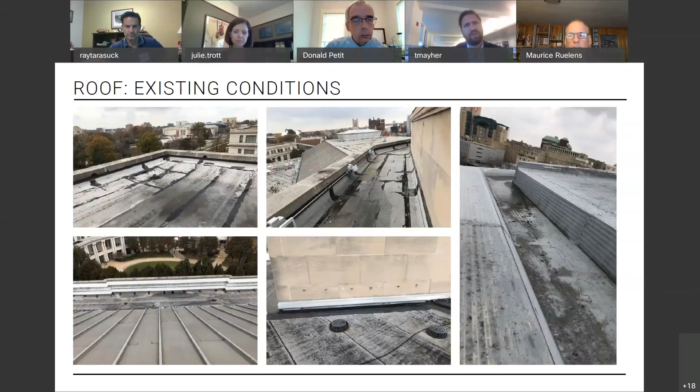You can see where those roof areas are identified on this aerial plan. We are looking at replacing the modified built-up roof in the section identified as section 1, and what we call the wedding cake roof, which is the main drum at the top.

That's a flat seam metal roof that will not be replaced, but a clear sealant will be applied over top of it. About 10 years ago, the same sealant was applied to that metal roof and it's held up for 10 years. There are some leaks on the south side, so we're going to recoat that entire metal roof with this new clear coating, which will again prolong the life of the roof.

The number 3 roof area is the metal standing seam roof, really the only roof plane visible from the street. That's in good condition, so we're going to keep it as is, and it should last another 10 to 20 years without significant maintenance or replacement. But the other roof areas, in sections 1 and 2, are not visible from the street, and we are going to replace them.

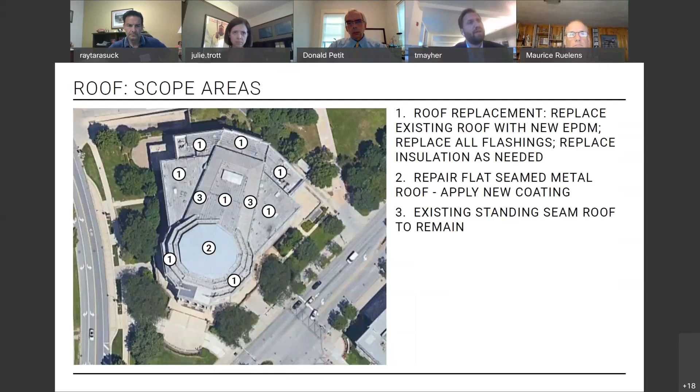What we are going to do differently with the roof is add solar panels. Severance Hall would like to provide solar panels for more sustainable energy to the facility. We worked with BT Solar and identified certain areas of the building where we could put solar panels that would have very minimal or no visual impact at all.

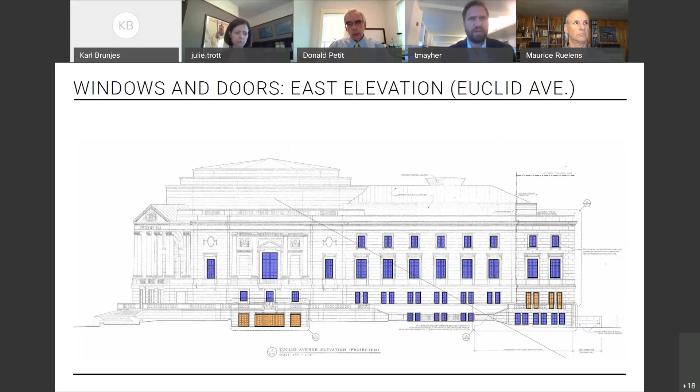Again, this is the elevation off of Euclid Avenue. So you're seeing most of these are the original windows, and the section of the building to the far right of this image are the windows from the 1990s addition.

Also, I mentioned the budget concerns from the first part of the project, our first part of the presentation. These were a far greater cost to replace than the rest of them. So we are not doing any work at these windows at this time.

Next slide. So the product that we identified for the windows is going to be a Graham Architectural product windows system. They have a historical architectural window—they have several products that are for historical architectural windows that are aluminum that have worked in many buildings across the United States.

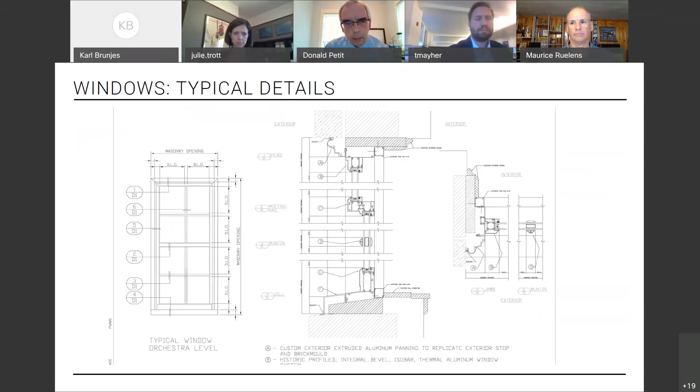I think the last thing we'll talk about is site work. I think, again, if we had full budget, we'd do a lot more site work, but we focused on getting the building dry as much as possible.

So we'll replace those grates with more ADA accessible approved grates for drainage. Then we'll replace the pavers with concrete.

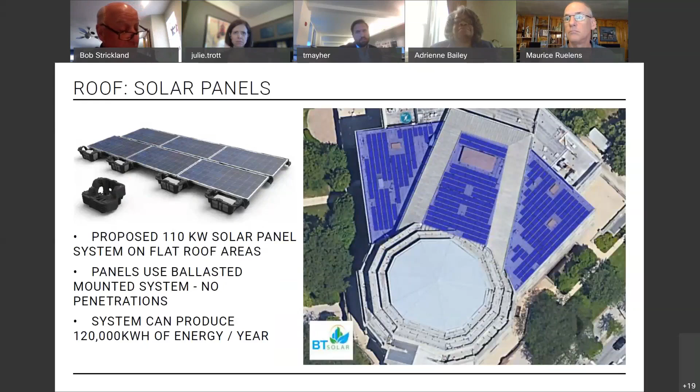And my second question was on the Garfield Memorial project. We had an opportunity to review several of the replacement mortar samples, and I wondered if we would have a similar opportunity for this project to weigh in on the actual replacement mortar samples.

Let me address the paver replacement real quickly. Those pavers, I think, are maybe a 6-inch paver square, so I do not anticipate a score line on the concrete that tight, but we would have some sort of score line control joints in the concrete that would reflect a border similar to the pavers, but also reflect the architecture, pulling some score lines off of the mullions of the doors. As far as Garfield goes, with the mortar replacement, yes, you're welcome to review the mortar at this project.

Just a caveat: the mortar at Garfield, we replaced all of the mortar in that building. We were studying which mortar we should replace, because there were a variety of different mortar colors on the building, since it had been replaced in sections over time. So we reviewed, tried to identify an example of the original mortar, and looked at samples that best matched what we thought was original to the building.

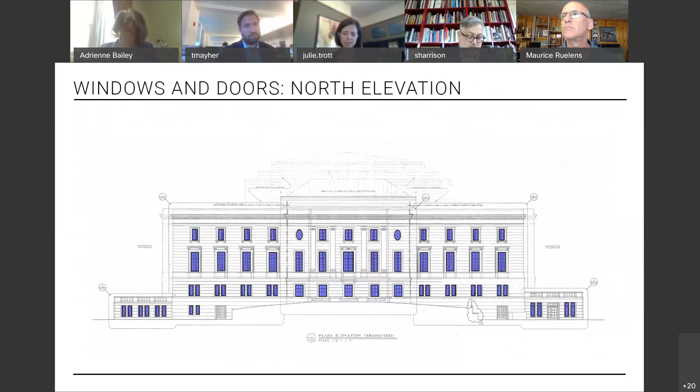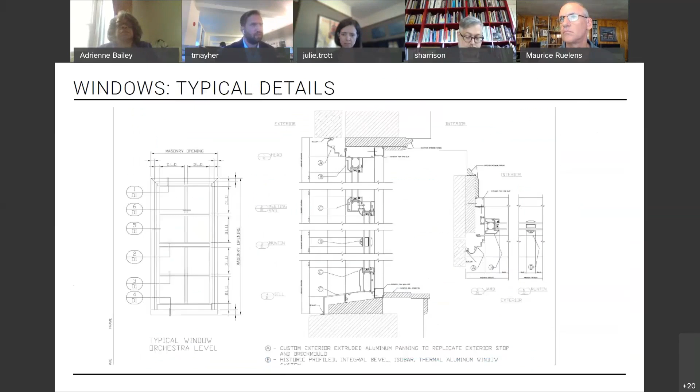And the doors, will the repainting of the aluminum doors also match the windows, or will they stay more of a natural aluminum color? It will match the windows. Okay, and will the brick molds be maintained or replicated in the window replacements? They will use a brick mold from the manufacturers. They have dozens of brick molds available, and we'll find one that's closer matching to the one at the existing windows right now.

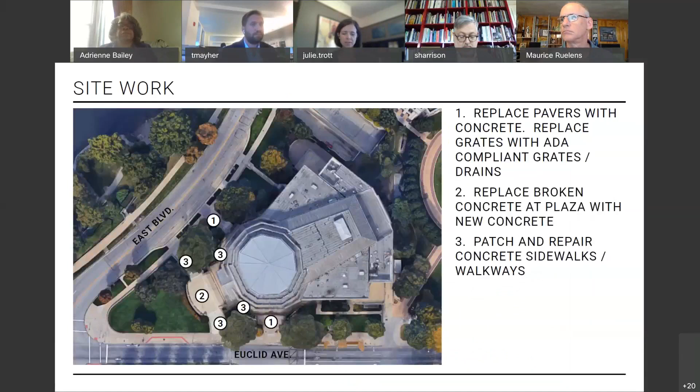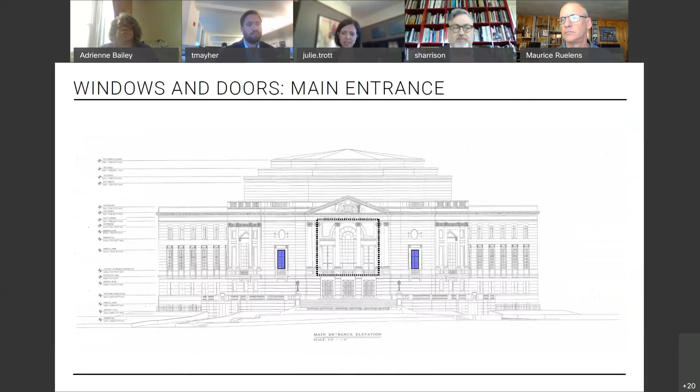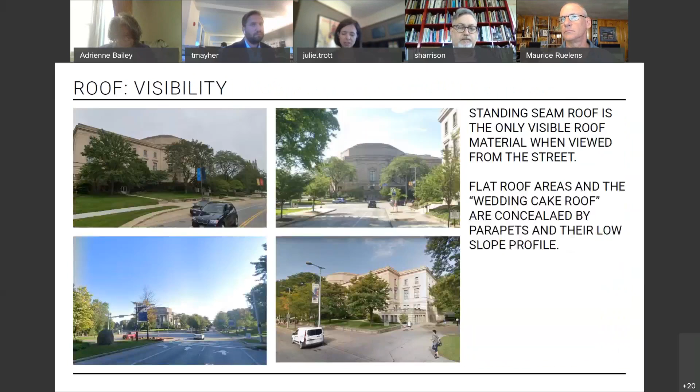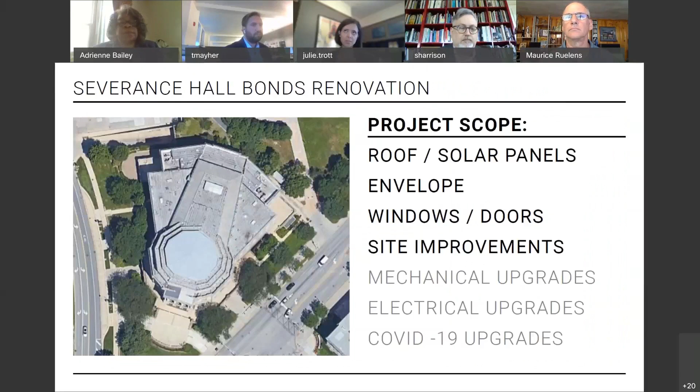Okay, well, personally, knowing the Musical Arts and the care that they take on this facility, I think it's a very respectful restoration. I agree with Mr. Harrison—no one likes to replace windows, but these windows have lasted 90 years, and the orchestra has thrived and done the best they could with the windows they have. So I think it's a very respectful restoration of the windows and roof. I really appreciate Musical Arts pushing the envelope on the environment and trying to incorporate solar panels and improve the building performance, knowing that they are a nonprofit and funds are always limited toward building maintenance. So I think it's a very nice proposal. Go ahead, Mr. Petit.

That's all right. You stole my question, so I'm good.

Are there any other questions from the commission, or would someone like to put forward a motion? We have Ms. Bailey. I propose the motion. That's why I was asking the question, what was part of what I'll be making the motion on.

I move that the motion is to approve as presented, with samples of the windows presented to staff for approval. And that's all that I have, unless it's something I missed.

Madam Chair, Mr. Harrison. I just want a second. Okay, so we have a motion, we have a second. Further discussion, go ahead. That was why your hand was raised, Mr. Harrison? Yes, yes. Okay.

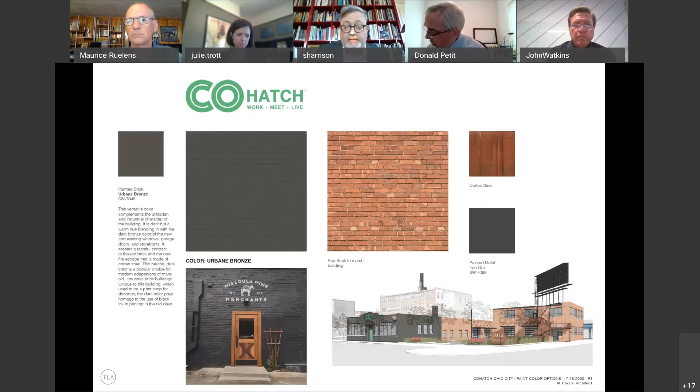However, I'm not sure that it really goes well with the other color scheme of the buildings. So, I still think the urbane bronze is too dark and not appropriate to an early 20th century building, and the gray I find anemic. But that's my personal opinion. I think the most historic color of these three is the third one. So that's just what I would like to add. And I don't know how I will vote at this point.

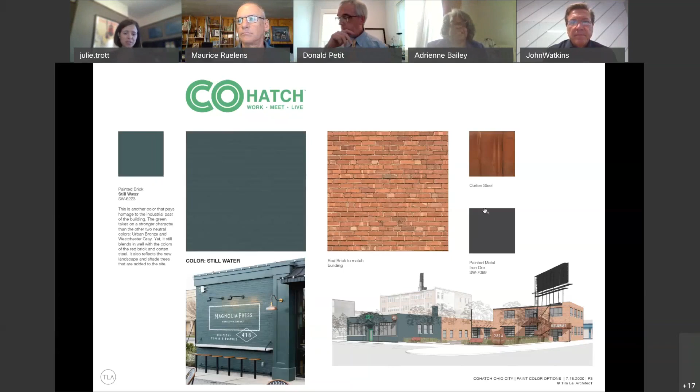Mr. Secretary, could you call roll and announce the results? Ms. Anderson, yes. Ms. Bailey, yes. Director Collier, absolutely, yes. Mr. Dreyer, yes. Mr. Harrison, yes. Mr. Strickland, yes. Mr. Tarasuck, yes. Ms. Trott, yes. Motion passes unanimously.

Thank you very much, I appreciate everyone's time and consideration to this project. Thank you, we look forward to seeing you Commission members soon. I'm very pleased to be a part of the community in Ohio City, and we're hoping to begin construction in October and open in late spring, early summer of next year. Excellent, well thank you, and we look forward to seeing your project move forward. Thank you very much.

That concludes our certificates of appropriateness for today. We'll move on to concept plans. We have one on the agenda today. It's located at West 28th Street and Church Avenue. It's new construction of Live Work Longhouse. The applicant, please use your raise hand function and tell us about your project.

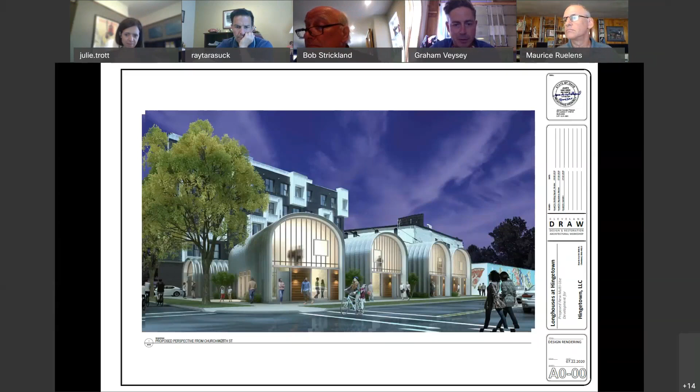If you want to progress to the next slide so we can see a site plan, this will be a little bit more helpful, but I wanted to give visual context of this. Maybe one more. Marika is also my partner, not only in these projects, but also in life. I'm only seeing the render still, so it's still looking okay.

If you progress one more slide, we can actually see the layout of the 7, how they fit. The entirety of Church and State, so that property line behind parcel A, down, that's the ramp down to the underground parking. There'll be a vehicular alley there. Again, this is some of that neighborhood context. Keep moving. I'm looking for, it would be slide 6 in the deck. There we go.

So it's a slide after the context photo. Yep, it's on there, just in a second. Perfect. Technology is wonderful.

For the vehicular lane, we're using permeable pavers that have grass coming through them, so you get more texture there. Don't think of a blacktop cutting through the property—that whole wall to the west is where there's the ramp down of Church and State. We're trying to create a little bit of space between, a natural alley, and then you've got the 7 structures in different lengths, with heights slightly different.

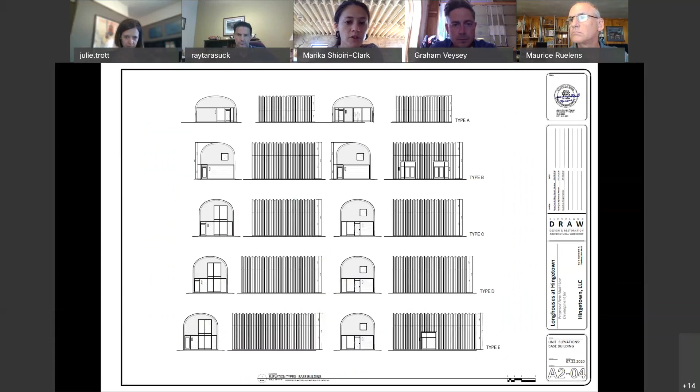Basically, we've tried to keep these interior spaces as open as possible. We're interested in them being very flexible live-workspaces, so we want to keep them as flexible as possible for whatever uses people might want.

You can see here we have very simple, pared-down kitchens and bathrooms, but they are full ADA kitchens and bathrooms. We have essentially a long bar of kitchen and bathroom tucked to one side, hiding a linear staircase that heads up to the mezzanine level. The dotted lines show the line of the mezzanine.

So there would be an upper level that, if it was a residence, somebody might use as their bedroom, or somebody might use as an office. And then there's a really nice double-height space on the left side of these plans, so people will have that double-height living space.

As Graham mentioned, we've tried to orient some of the windows so you get sight lines all the way through the buildings. Each unit has access on both sides. We were really just trying to make these very open, flexible spaces that can be used in a number of ways, clustered around a central court to create a small creative community. That's kind of the goal.

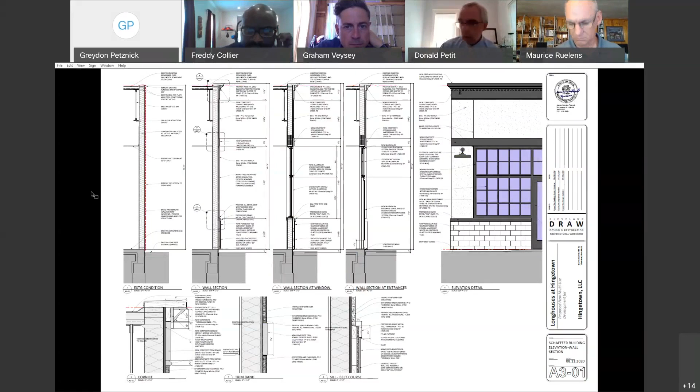One other thing I want to bring up with respect to the burden we have in making these decisions is you have to look at the long term. You look 20 years out, what will this look like from a design perspective. I like that you talked earlier, Graham, about using this as potential live-work commercial space, so that adaptability is very important. 20 years from now, we often design to today, and we don't think about how the site will evolve or how units could be rethought if conditions change. I think we need to be mindful of that.

Just being mindful of how we do design and architecture so that it's somewhat timeless. The beauty about the Landmarks Commission and historic preservation is that there was a time where things were built where the design was timeless. It lasts 100 years. This is what makes an adaptive reuse project relevant, because the base architecture was such that it's like that sport coat you can wear for 20 years and it never goes out of style, and you can rock it with some jeans. So thinking about how you make sure these designs and land uses are flexible and can adapt to change, so you don't get a cool thing today that becomes an eyesore in 20 years. We have to make sure we're thinking about those things, and that can be very difficult, particularly in a time where we want innovation, which I think this project brings to bear.

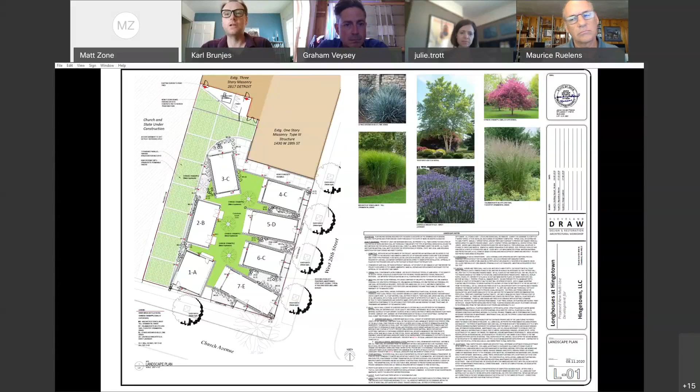When asked why they were pushing for final approval, the applicant stated it was a COVID-related, quote, 'slow as molasses' process, and there's some questions I'd like to ask regarding that first. Slow as molasses on a cold day uphill. Okay, I will ask, when did you first come up with this concept for this area?

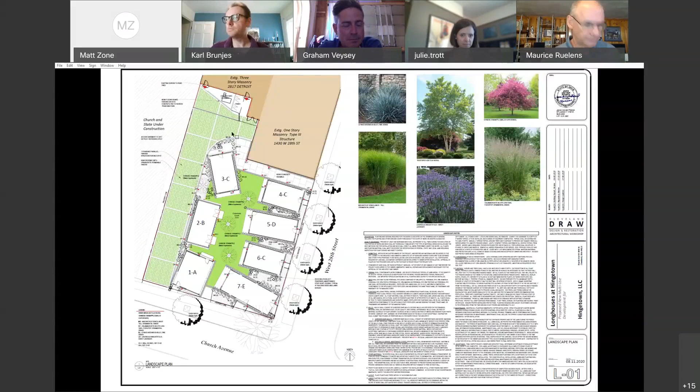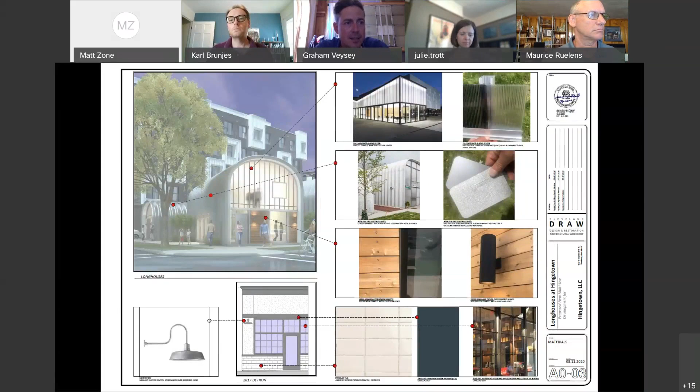We engaged Greydon last year. We presented to the Block Club originally, I believe in February. So we were sharing it with folks in the community, and I guess the challenge was not going in front of local design review earlier, but this was out there and we had been sharing it with people at the city, as recently as last year I had a meeting with the planning department about this, showed them the picture. Matt Moss was in the conference room behind me with the preliminary drawings. But I think our challenge was not Mr. Petit or somebody else from this commission. So I think that was our challenge.

Okay, did you send this to Landmark staff at all for review or feedback before your current presentation? No, not to my recollection. Okay, so we've not seen this, and you don't know me because I'm pretty much invisible, people are finally getting to know who I am, as Don's partner in crime there. So I'd understand why, but we didn't know anything about this project until you put in for the permit, and we responded within a week to try and get this going.

Part of my question is, when did you speak to the media about this project? Somebody from the city leaked our conceptual sharing of this to Ken Prendergast, and he reached out to me without any outreach from me, Marika, or Greydon. So there was somebody at the city, in one of the departments we were soft-pedaling this with, that then forwarded it on to the media. So the first conversation with the media was a direct result of someone at City Hall sharing our drawings without any of our permission. We understand any email correspondence is open to FOIA and becomes public, so we acknowledge that, but there was no outreach on our part.

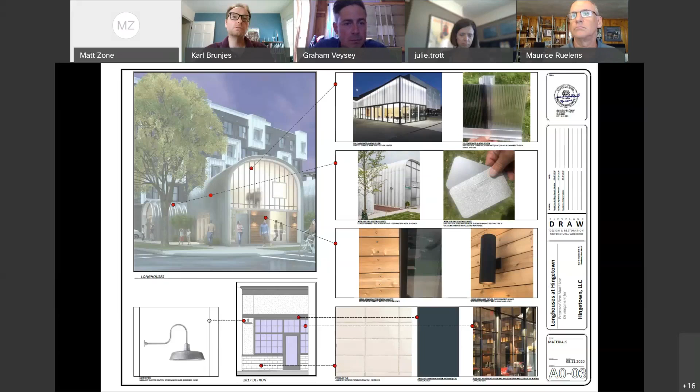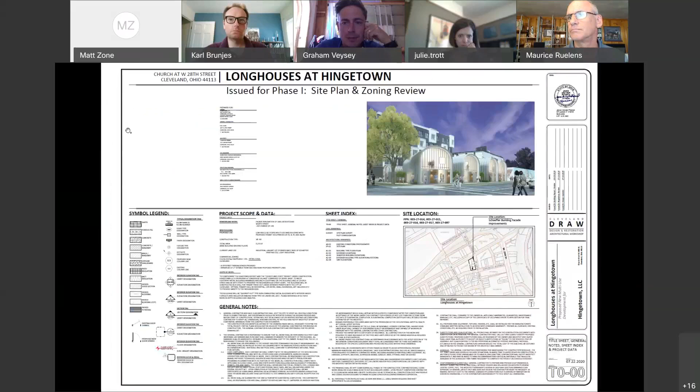East facade—can you show the east facade of the Eagle Hotel building? Above the Schaeffer printing? I think you need the site conditions. Probably slide 5 would be the best.

I don't think I've got anything shown on the rendering that fixes that. But can I see the rendering for the east facade of that building? So, no—I think slide 9. Slide 9? Okay, so the elevation. Yes, please, sorry.

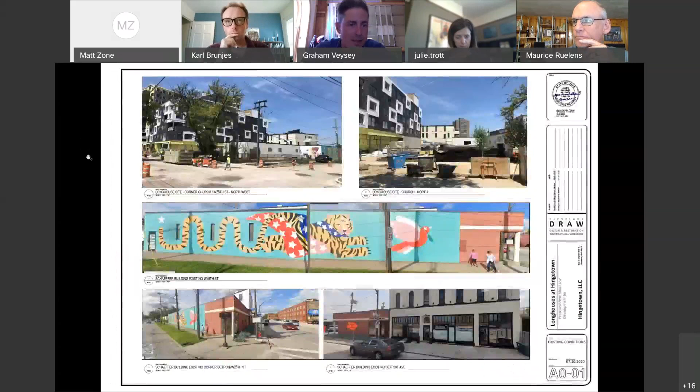We do not at this point have a plan to change that, just because of the cost it would take. That's an eventual goal, to get a cast iron, powder-coated black railing. Okay, so as Don mentioned—yeah, that's our living room. Yeah, that's our front porch, or side porch rather.

So as Don mentioned, we have varying opinions. I like the idea, I think it's transformative, as it was in True North, but I don't know if it's entirely appropriate for this particular area in a historic district. I could see this being put somewhere like an industrial area, maybe down in the flats—somewhere lower that needs development. This could be a kickstarter for an area that needs development and can have something built around it. But in my opinion, it's not appropriate to this location. Based on everything we're supposed to do with the standards, I like innovation, but again, it's about appropriateness for me. And that's it for me.

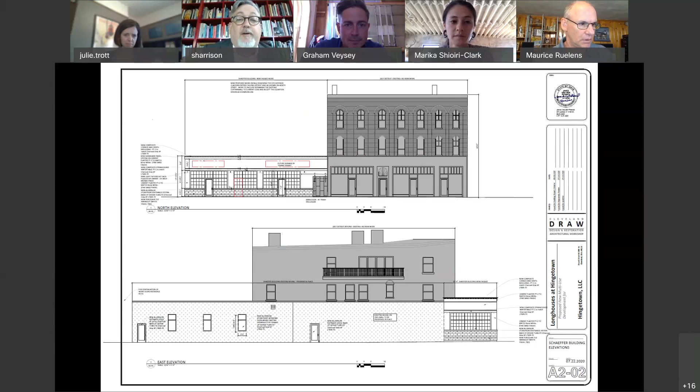Thank you, Madam Chair. I enjoyed the colloquy on city planning and modern architectural forms from Director Collier and Mr. Veysey. That was interesting. Director Collier, you said these boards and commissions need to get used to the fact that life is evolving and changing. But I'm a historian, and I'm concerned with historic architecture. I sit on the Landmarks Commission, which is charged with protecting the architectural, historical, and neighborhood integrity of historic districts and landmarks in Cleveland. So I don't feel like I need to get used to anything.

I really don't like being told that. I just wanted to put that on the record, because I sit on this commission with a great deal of seriousness and take the role very seriously. So I appreciate what Mr. Brunjes said about the Secretary of Interior standards, and always coming back to that, because those are a guidepost for landmarks commissions around the country.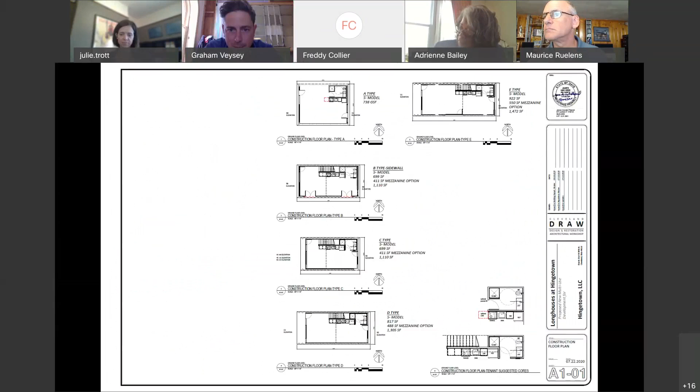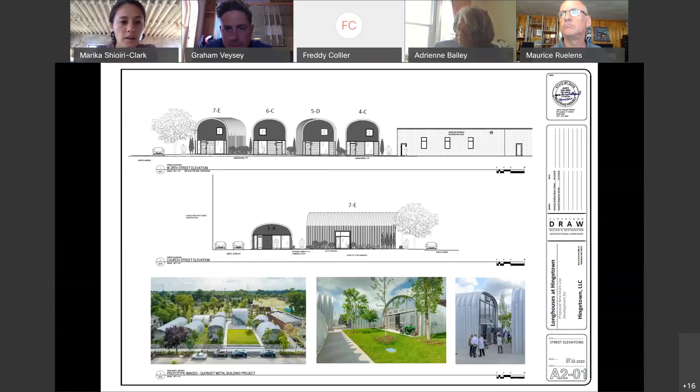Yeah, so the typical height — I'm just pulling up specifics, I want to give you the right answer. There are two different heights: the four that are along West 28 are just over 20 feet high, I think 21 feet, and the three that are closer to Church and State are slightly lower, at 18 feet, partly to accommodate the second floor of Church and State. The lengths vary — Greydon probably has those numbers — but it's a modular system with 2-foot increments. The longhouses, based on where they are on the site and their view, range from 36 feet long down to 24 feet long.

Ms. Bailey, the next question. Sorry, I was talking with the mute off, the microphone off.

This is Cleveland with snow and all that. So what's the control, since you have a curved roof, for snow and ice, to prevent injury if someone walks near the structure? Part of the landscape approach will be to make sure nobody is hugging the sidewalls, in case of any snow slide. We will be landscaping up against the building so that if there was a snow slide with heavy wet snow or anything violent, it would hit the lavender and not a human being.

I could probably speak to that a little better. They are all fully metal buildings, which by nature are fire resistant. We are taking steps inside to fur out the metal, not only for insulation but for fire protection, including the sprinkler system and in some cases 5/8 type X. We would be classified as a type 2 building overall, but we are using some wood inside. So in many ways this is like a pre-manufactured metal building, like a Butler building, looking at it as type 2. Even though you don't see many Quonset huts, the approach is similar to the type 2 Butler building and its improvements.

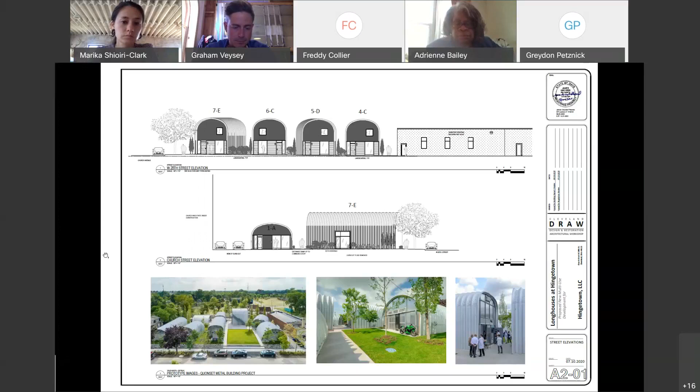One more question. When I saw this, it reminded me, although it's an individual structure, of an efficiency apartment with a high ceiling. What's the occupancy code and maximum occupancy allowed in this building? I'm just curious.

The city does have a minimum square footage for each building, residentially in a D zone. That threshold is 950 square feet, which with our second floor lofts does meet that requirement. Each building is slightly different, but we do pass that threshold. The open plan is designed basically for maximum flexibility for the tenant should they care to improve it within.

One more thing, can we go to the site plan? I'm looking at how you're having parking in a range of 7 units. I noticed you have 7 cars with a vehicle shown there, unless you're just using that as a pass by. But you have this small little corner that vehicles are going to use to turn around. Is there any way you can either widen that or create more of a turning radius in that space?

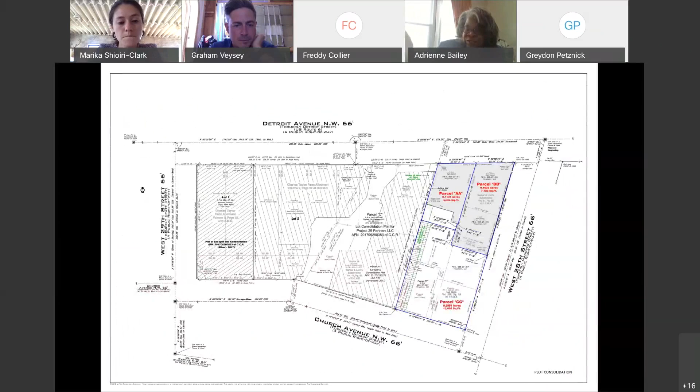Could you talk more about just the parking? Apparently the parking is going to be along one portion of the site, and I noticed at the top portion is an area where you're going to do a turning radius. So I'm just wondering about that.

The issue is that the site has limited space, and we didn't want to sacrifice one of the parking spaces. The way to get a larger turning radius would be to only allow for 6 parallel parking spaces, but that would mean one of the units doesn't get parking. Otherwise, we're very limited on space for the drive lane, and any space we put into a wider traffic lane means less space for the outdoor green space for residents. We're trying to maximize that part and make the traffic turnaround space, which is essentially back of house next to the dumpsters, usable but also as efficient as possible. That's kind of how we came to that.

We had explored at one point having an exit off of 28th, but we didn't think that was conducive to an evolving landscape that's not auto-centric. So we wanted to keep the existing apron, and we're actually eliminating a secondary apron just to the east of the existing one that's going to be there. So we're limiting the pedestrian-auto conflict zones.

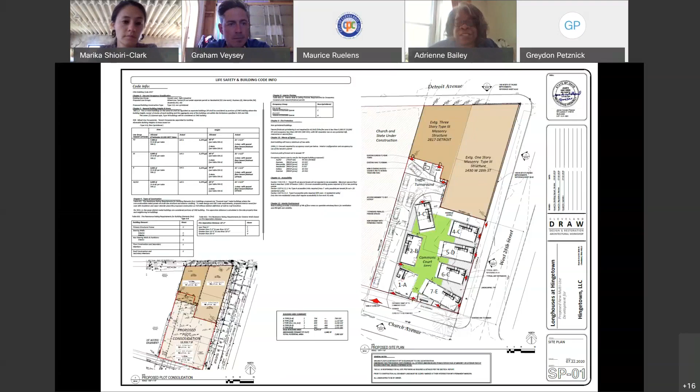So where the dumpster is, there's not going to actually be a vehicle parked there all the time, right? That's just a diagram to show the turnaround, correct? Okay, 7 spaces are the only parking spaces. Yes, no vehicle is going to be parking there. All right, because that was one of my comments I was going to make, about making the green space smaller, but that's not what you want. You want to try to maximize it as much as possible.

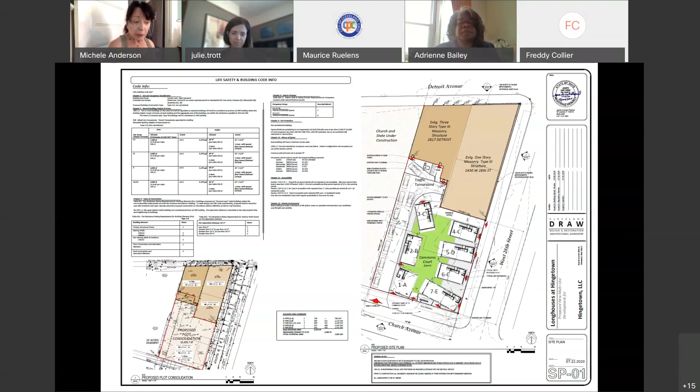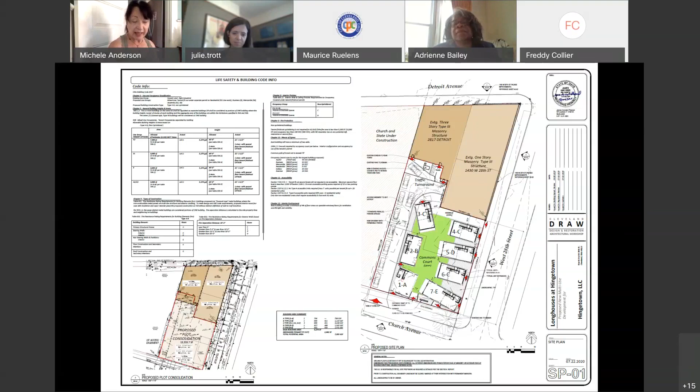There's a lot of areas of Cleveland which could really use something like this. Unfortunately, I don't think this is the location. It's sort of minimalist, manufactured home meets hoop house kind of light, that it's just not part of the original construction in that neighborhood. So I just wanted to bring that up. Also, the sizing is not that consistent either with what's going on in that particular block, in that particular community.

I would just implore the commissioner and any other commissioners - I've talked about the uniqueness of this corner, and Alex Frondorf, who's the chair of our block club, who is very much a traditionalist, and a member of the design review committee of Ohio City, said that once they actually stood on that corner, they changed their opinion on this project, because I think they had a lot of the similar reservations that you had, Commissioner Anderson.

As I had mentioned, we've spent now probably 4 or 5 years thinking about this corner and how best to approach it. It's not just a piece of property that we own, but it's our home. Living up there, Marika's 4 months pregnant, and so it's where we're going to raise our child. For us, it's been a very intentional process to try to find the design that is most appropriate.

So I think if you or any of the commissioners, it makes sense to meet out on the site - I think it makes more sense when you see it in context. I think that's why this vantage point is a really good one, because when you start to think of other things that could go there, they actually fit much worse. And it's interesting, I was up on the 6th floor of the church building, and I could see the hoop houses of the Ohio City Farm from there.

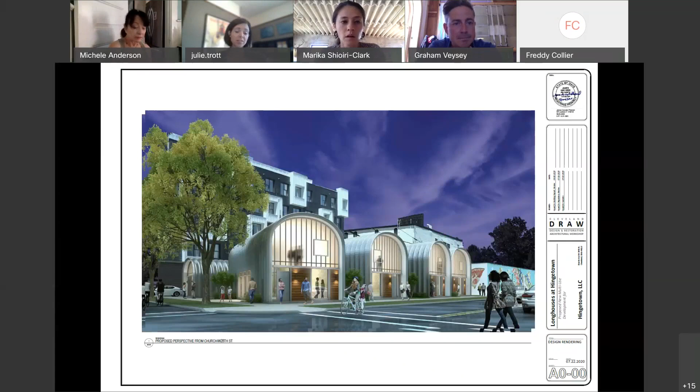I'd like to make some comments because the conversation has been wonderful. It's covered many of the feedback points I wanted to give, but a few things to reinforce or bring forward as new comments. I think it is very intriguing, but I am struggling a little bit with not seeing more of the context.

I've looked on Google Earth, so I know the area fairly well, but it's always nice to see it in context. I think the interesting thing is the scale of the buildings going in around it, but the direct neighbors are 1 story. So, going back to what Carl mentioned, it's about trying to meet the urban form, rhythm, and scale, although the look can be different.

Can I ask why you chose to put the 1-story structures on the interior of this site versus adjacent to your 1-story building that you're restoring?

The slide I'd pull up to address that would be slide 8, because you can see the different heights relative to those buildings. Sure, they're 2 stories, but that single story is a tall single story, or a taller single story.

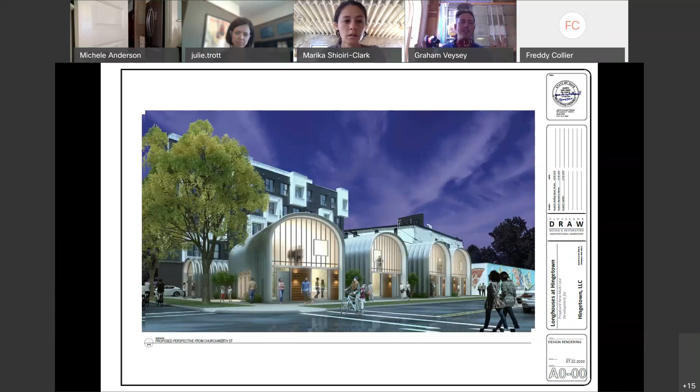We felt that what's labeled as 1A in the drawing draws folks in. So if you're walking east on Church Avenue, you're going to see that topography with that 1A building. Your sight lines are such that you're drawing folks into the commons, having an event like that, so you're not losing the 6 other structures around it and masking it.

So it's to preserve that sight line. I think that's the sculptural quality I mentioned a number of times that we're really enticed by. You can see that ribbed range, if you will. And I know we're still in the render, but I don't see it being like they're twice as high as the single story.

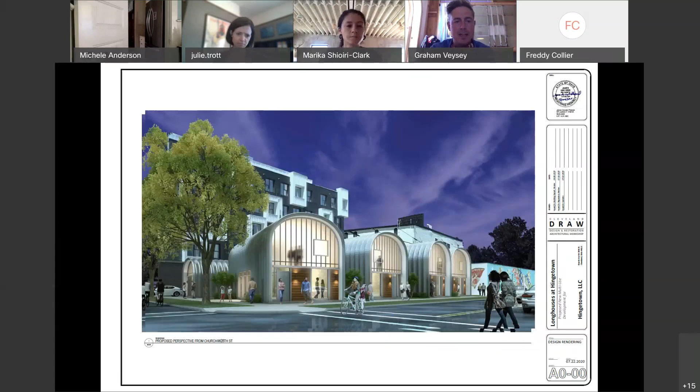They're the 1A compared to the 7E. Yes, it's a different height, but it's not half of 7E's height. And the same is true of the 2 stories — not twice as high as the Pizza and Flying Tiger building.

Just to clarify, they're all 2 stories with the exception of 1 building. The only difference is a slight height change to accommodate the 2nd floor windows of Church and State, so the 3 against the building are not 1 story — they're all 2 story, with the exception that we've been contemplating adding a mezzanine on that one also and making that a 2 story. It's just the scale.

I think you're now going to have more of these stories, but you do have this sort of unique 1 story that is the project we just saw prior, across the street — the Pizza Tiger building, as you call it — and then the restaurant just south of this. So I just think introducing it on the interior of the site feels more awkward than appropriate.

I am also struggling with — I won't say asymmetrical, but the less structured layout — just because when you look around this neighborhood, it's a regimented, structured configuration of buildings, both modern and historic. So I personally wouldn't mind seeing it a little more structured, at least along the perimeters, because I think that would help it blend better. I won't say blend architecturally, but from a planning approach.

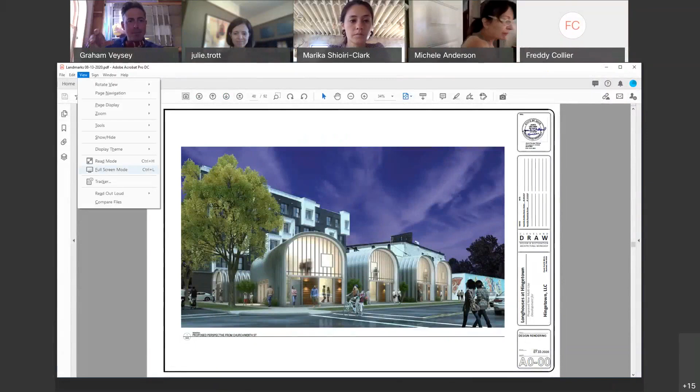Any influence that this commission had on that design is welcome - it's something we look out to. But what they didn't do is wrap the building down 28th, so you don't have the massing along 28 that you'd expect. It's just facing on Detroit. I know Pete Snavely was really cautious - they did not invest in underground parking, it's all surface lot. So with the Rex building surface parking lot, this is a nice step up back to the church building.

We can bring some additional context photos, I think, for the next time. Yeah, definitely.

So on the point Commissioner Trott was making, originally we did not have the traffic line with parking at all. But from feedback from our block club and neighbors, especially with the city eliminating parking on West 28th Street as part of its resurfacing project - and there's a lot of neighbors angry about that - we felt that providing at least one street space for each longhouse was a good compromise. That was one of the evolution strategies we took. It did end up shrinking the common space a bit, but we thought providing that flexible residence was worthwhile.

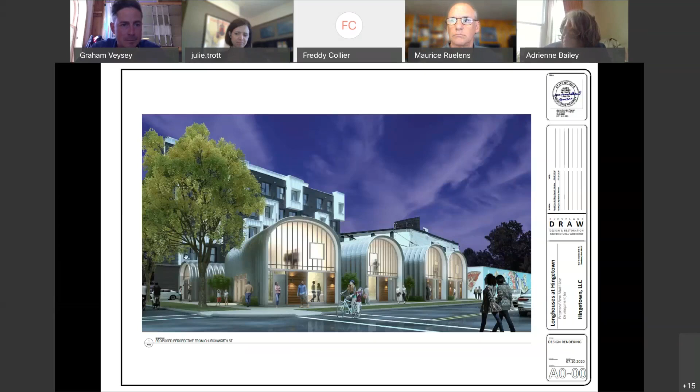Yeah, thanks. I just wanted to go on record in response to a comment that was made earlier, that as the Landmarks Commission and as our boards and commissions, we often are faced with some difficult decisions with respect to proposals that we get, and staying true to the fidelity of what it is that we're tasked to do. Obviously this project is no different, and I believe that as we move into the future, it's going to get even more challenging, particularly when we see intriguing and innovative projects like this, and having to make that call on their appropriateness in districts like this.

But I do want to say, I just think it's important that we honor the various perspectives that we bring to the table. We have very talented, capable individuals on the boards and commissions with their expertise, and I value the expertise of individuals on this board. There are also alternative perspectives on the board, and I just want to be certain that board members are clear that those perspectives are heard and honored by myself and our department and this administration, which is part of the reason why you guys are here, to continue the work that you're doing to protect the integrity of these districts. But I do want to just say, any comments that are made about a particular case are the perspectives of that individual who is making the comment.

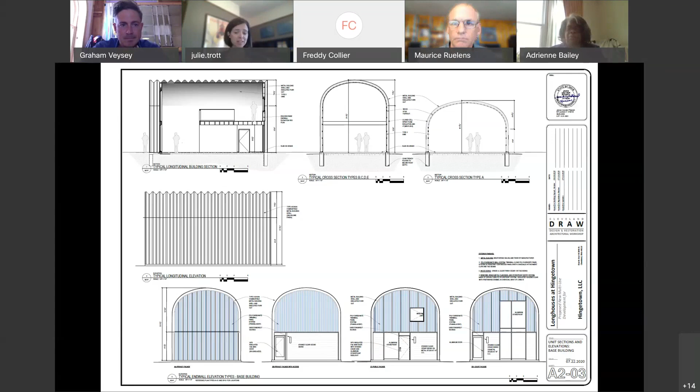Thank you for the time to review this, and we look forward to seeing you come back here in the near future. So with that, if there's nothing else, we'll conclude our concept plan review and move on to our reports.

Okay, so we have one report today, and I'll hand it back to Mr. Petit. Don, are you giving us the background on this, or is it Ms. LaPlaca?

Well, thank you, Madam Chair. I just want to point out that for the past 10 years, the Commission has enlisted an AmeriCorps member to survey one or more historic neighborhoods in the city of Cleveland. This year, we were privileged to have Julia LaPlaca, who surveyed a section of West Boulevard, an existing historic district that was never properly documented when we designated it almost 20 years ago. Today is her last day with us, and she's here to present her findings and survey report, and to also talk about some of the other buildings she documented for the Ohio History Connection.

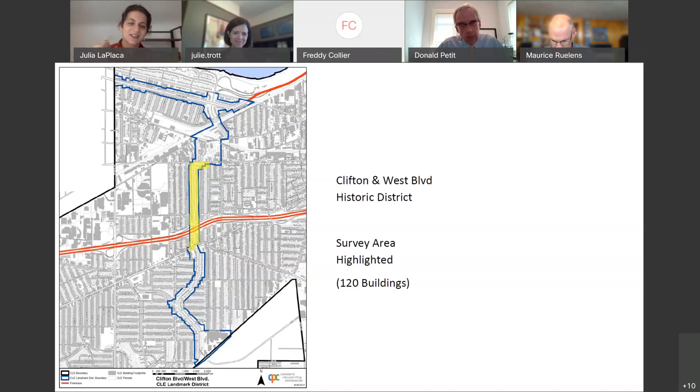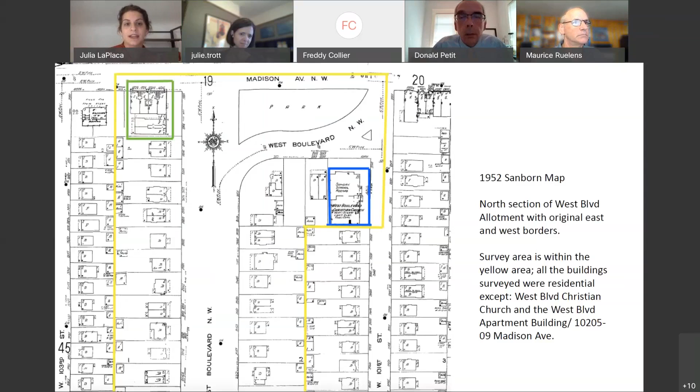For those not familiar, I completed an Ohio historic inventory sheet for each building within the survey area. This asks for all kinds of information: foundation material, when it was built, a little about the history of the residents, what kind of windows there were. I got this information from the records office, mainly looking at permits, which is always exciting, going into the records room, and also physical observation of the buildings, as well as other online resources like archives or ancestry.com, county records, etc. So I did one of these for each building. This particular form is generated by the SHPO's database, so that's why it looks pristine now. The state generated it.

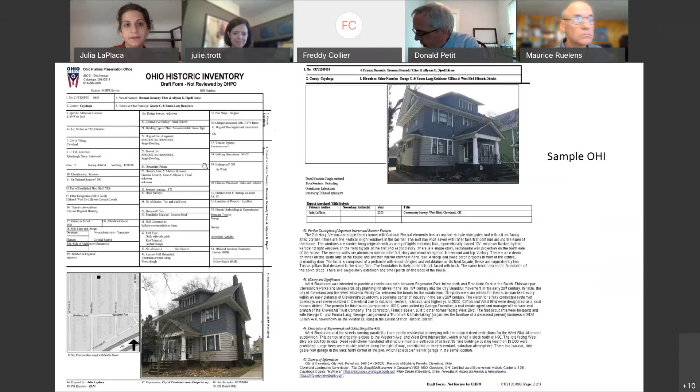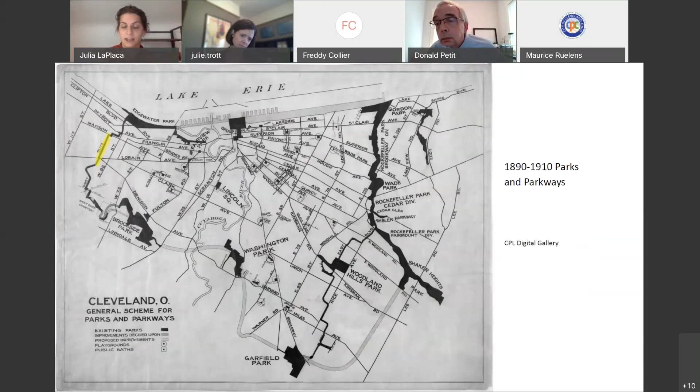Cleveland decides to tackle this through campaigns like the Group Plan in 1903 and by developing parkland. Originally the city wanted to have a 'chain of verdure'—parkways and boulevards that would connect all of the parks around the city. West Boulevard was going to be part of this. You can see the highlighted area, that's where West Boulevard is. It originally was going to be part of a connector between Edgewater Park and Brookside Park in the south. This did not happen—right by Brookside Park, now where the zoo is, there have always been railroad tracks and an industrial complex there, and it was not realistic to just slap some parkland in the middle of that. So it didn't happen, but West Boulevard was developed, and its maintenance was overseen by the Parks Commission for many years.

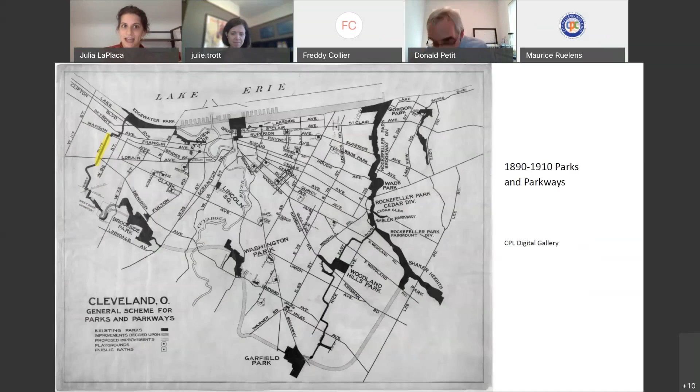Again, my survey area was just those properties facing the boulevard, not the commercial strip on Lorain.

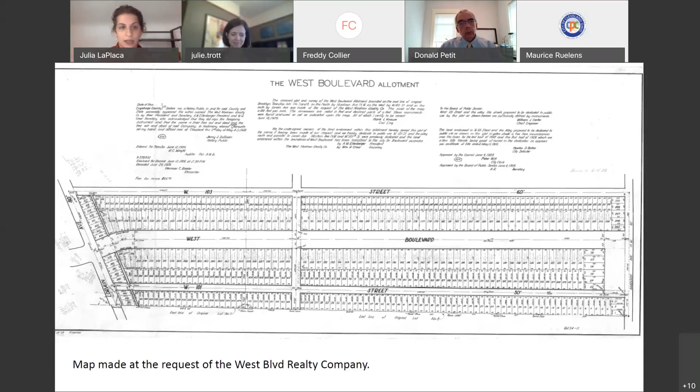And all of the plots and the selling and buying was overseen by the West Boulevard Realty Company. Next slide.

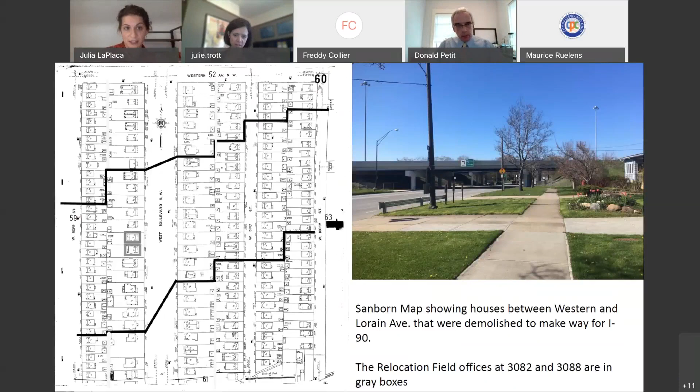One of the interesting things I discovered, in these little gray boxes on the west side of the street, are two locations of a program the Highway Department instituted called the Relocation Assistance Office, or something like that, where they set up shop, and people in Cleveland who had to move out because of the highway could go in and get moving funds from the state. Those were allocated based on how many rooms, whether furnished, and if you were a business you could get a bit more money. All of that happened on West Boulevard—that's where they had one of their field offices. Next slide.

I'm going to quickly go through this. I don't want to end on a sad note with West Boulevard - West Boulevard is still beautiful.

Between 1999 and 2000, it became a historic district. The people who live on the street are really engaged. I benefited greatly from a robust block club spearheaded by the incomparable Sue Zimmerman. Councilman Zone probably knows her - she was my greatest advocate, and I ended up presenting three times to the block club, once at the beginning of the project and twice at the end, and have been giving individual homeowners their OHI form about their house and copies of the survey report.